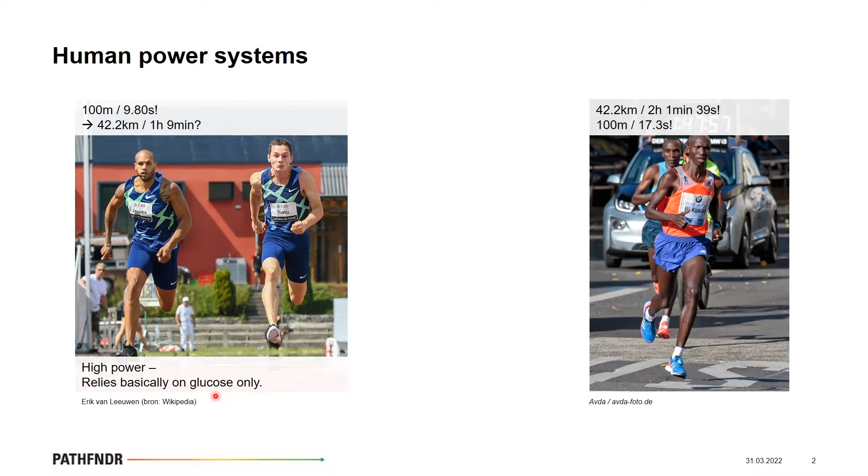And well, the answer is they rely mainly on glucose. So they are a high power system basically. And the marathon runners, they are more like a sustainable power system. They use glucose and fat, and this fat serves basically as an additional energy storage source that these runners can access, and they cannot access it.

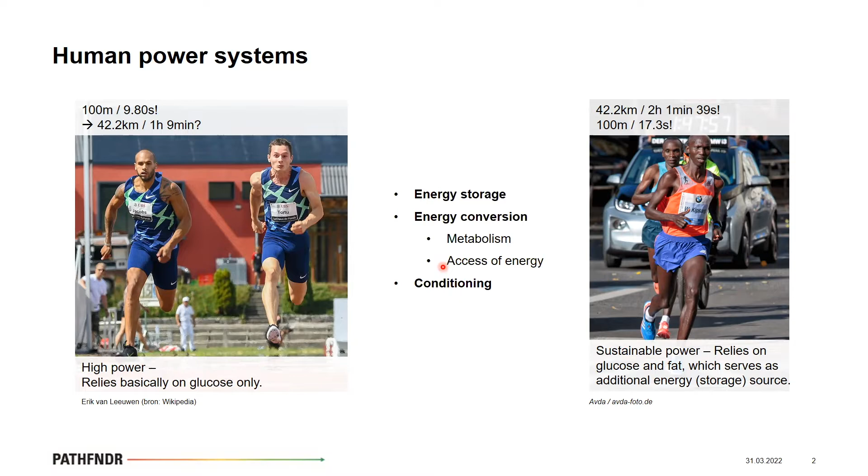So it's about the energy storage they have, it's about energy conversion. They can access the different energy sources differently, and they have conditioned themselves to be able to do that. And that's what we most likely will have to do in the future with our electrical power system or the entire energy system. We see here a graph about some electricity balances of Switzerland.

On the top left, we have the net between power production and consumption. So in the last couple of decades, we basically generated more power than we consumed, and we were able to export this power then to neighboring countries. However, in the last couple of years, from 2005 on, 2006 on, we had net import during winter periods.

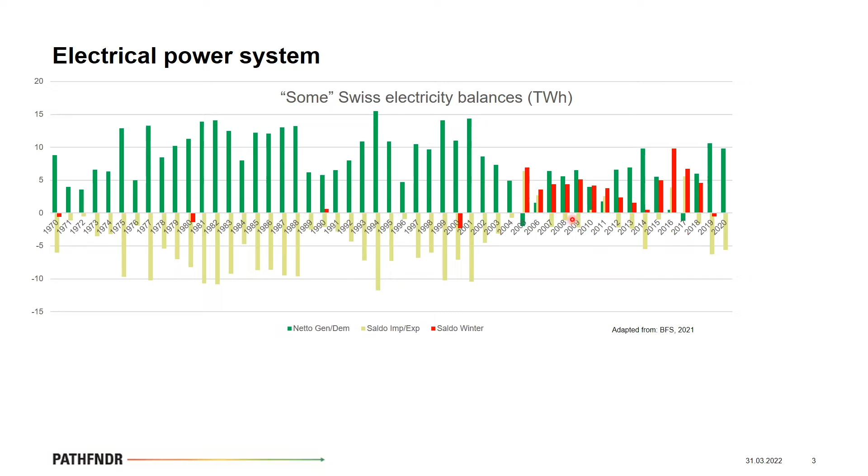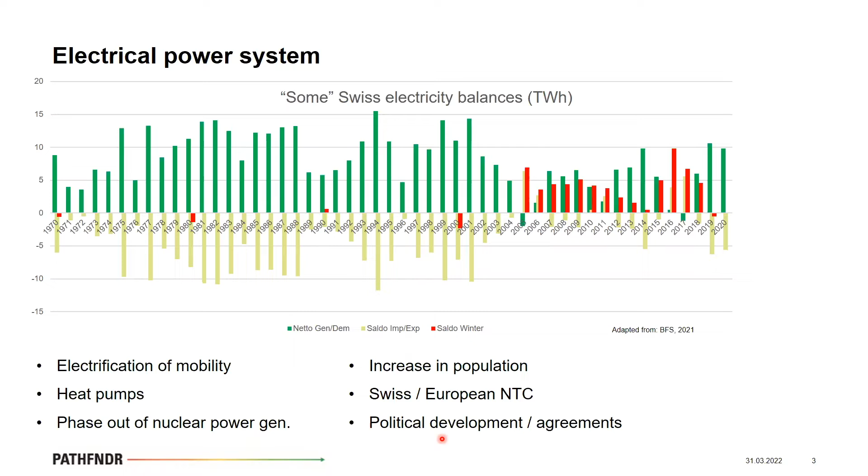And knowing this, and also knowing that we will have the electrification of mobility in the future's power system or energy system, which will lead to additional load on the electricity grid, and also employing heat pumps, and possibly the phase out of the nuclear power generation will also affect the electrical power system. Further on, then we have most likely an increase in population, further electricity demand, and there will be maybe restrictions with the net transfer capacities of electricity that we can import to our electrical power system.

On top of that, there might be weather effects like the Dunkelflaute, basically where no renewable energy can be harvested, and that might lead in future, that's a hypothetical scenario I've sketched up here, to us having the possibility to import around 10 terawatt hours of electricity, but we will still have demand that is not satisfied.

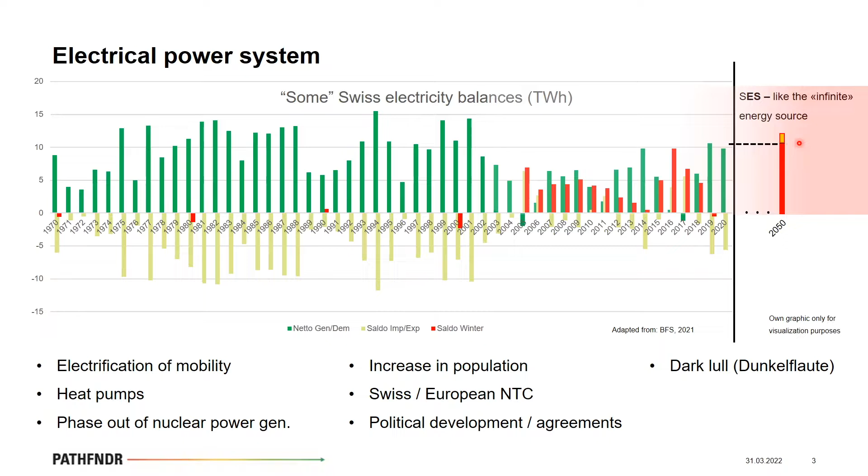And that's why we need something like in the runners scenario, an additional energy source, for example, hydrogen or methane, that we then can access and reconvert back to electricity. And that's one use case, seasonal energy storage, that the platform can provide data for, but also for other applications. I will cover one later on in the talk.

So the demonstrated energy system integration platform is about renewable energy storage. And to store renewable energy, you need to be able to convert the electrical energy to another vector and back to electricity. So that's what we want to investigate, the characteristics of the different chains comprised by the power-to-gas-to-power path. We also want to demonstrate this energy storage using relevant technology readiness levels. So the power plants we have, you will see that later on in the features, have a nominal power of around 100 kilowatt.

And we want to build a bridge. I mean, it's nice that we have this small bridge here from the ESI platform to the areal of PSI, but this could also be the outside world, like the industry and the public sector, where we want to have the transfer of the technologies to the industry, for example. And it can be also used as an educational platform to transfer the know-how to students or other scientists.

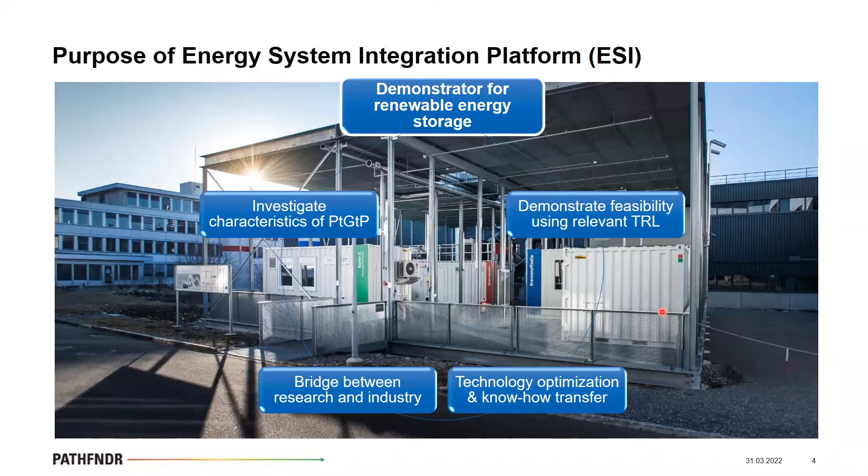What I'm going to cover today is basically the purpose we just saw. It's about energy storage, energy conversion, that we want to demonstrate with this ESI platform. Next, we will talk about the features of it, and then how the features contribute to specific case studies, where we investigated what possibilities are there to use the platform. And last but not least, of course, the application in PATHFNDR.

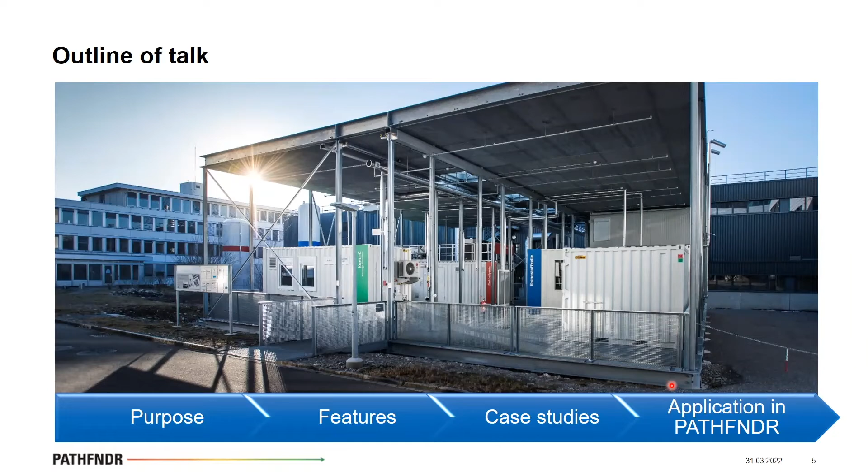We have two containers, one for dry and one for wet biomass. So we use the CO2 stemming from biomass, or one also could use the CO2 from the industry, to form methane with hydrogen, which then will be fed to the gas grid.

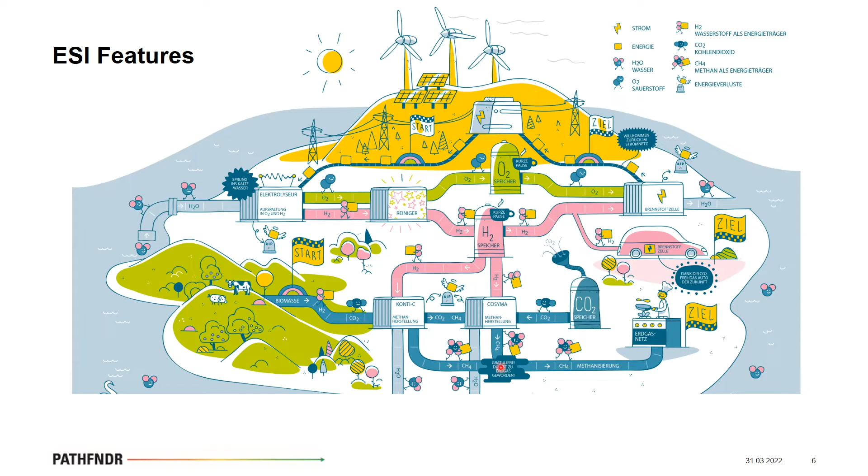And we will focus in this talk on the energy system integration platform's hydrogen path. The hydrogen path, as I said, consists of electrolyzer. In the electrolyzer, we have stacks that have cells with polymer electrolyte membrane cells, so it's PEM-based, and also the fuel cell container, the stacks built in there are PEM-based.

The entire chain also uses, next to the hydrogen, which is stored in this tank, oxygen. So we have two large tanks and a small tank for the methanation where the CO2 is stored, such that they can do their tests. So it's based on pure oxygen instead of air. The gas quality we can store is 4.5, so it's very clean. No impurities are basically in there, and it's also very dry. We achieve a dew point smaller than -60 degrees C.

And the platform in itself allows for intermittent operation, which is required for the storage of renewable energy. It's connected to the low voltage grid, and it is fully automated. That means we can access and do case studies using the power plants, electrolyzer, and fuel cell from remote places. The data acquisition system comes with a sampling time of 5 seconds and is based on a Siemens process historian system.

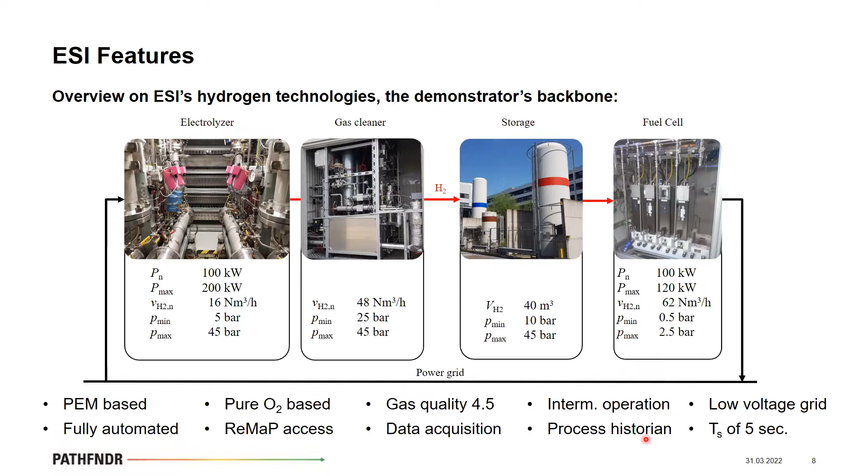And we then went on in collaboration with Swiss Hydrogen to build the fuel cell systems, 50 kilowatt fuel cell system, and integrated it in a fuel cell container. And the last point of the fuel cell container was in 2019, where we achieved to operate 100 kilowatt of fuel cell power to be fed into the grid via a series connection of fuel cell systems.

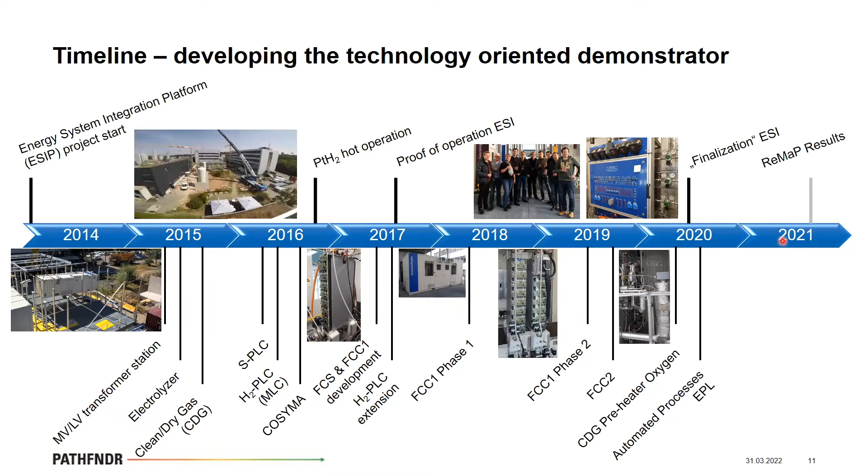Next to that, we have features like testing infrastructure for other fuel cell systems, which will be used also for Pathfinder later on when we want to test hydrogen air systems. And we improved already some parts of the processes, like the gas cleaner, which allows us now to start up the plants or the power to gas, power to hydrogen path much faster than before. And last year we did some ReMaP tests, and one of the results I will show you now in the case study slides that follow.

The case studies, the first one is about electrochemical energy storage. So not only seasonal energy storage, as I already mentioned, is a possibility to use hydrogen and the conversion processes taking place for this energy storage, but also, for example, peak shaving a fast charging station at the highway rest stop. We see that on the left-hand side, we have a Porsche Taycan, which has a charging curve. So that's in kilowatt power over the state of charge.

We then translated this curve to power over time, and we were able to use Empa's ehub battery to basically simulate this charging behavior. And if you don't do anything, you will cause a relatively large stress. So it was basically also scaled down to 100 kilowatt because the battery at Empa was not able to further increase the power. You would cause large stress if you drive 100 kilowatt or the 270 kilowatt of power over a transformer. And if you can peak shave that, of course, that would be a nice thing. And we will see later on here that you can optimize the operational costs.

And we demonstrated that it is feasible with a hydrogen energy storage system to peak shave such a charging demand. We see here the aggregated powers over the virtual transformer station, and that it actually pretty much follows the peak shave limit of 30 kilowatt. And by that, we also demonstrated that the ESI platform is accessible from the outside world and can be remotely controlled.

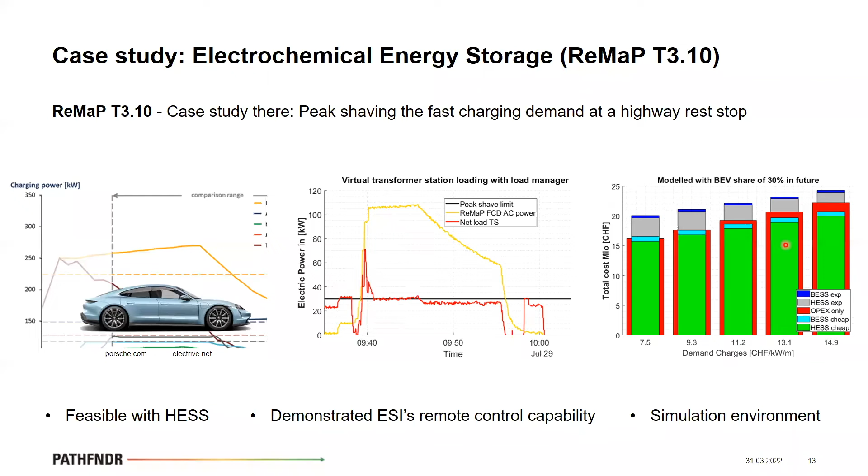The second use case I will talk about is the advanced control algorithms for the future energy system. It was about electrolyzer modeling and real-time control for optimized production of hydrogen gas. We see the Silyzer 100, its representation sketched here. So there are different parts within the PEM electrolyzer.

We have the power converter stage, basically rectifiers. We have the stacks. We have pumps, several pumps to achieve the cooling of the stacks. We have external coolant loops and passive elements within the electrolyzer. And if you want to use an electrolyzer in model predictive control, you need to derive a suitable electrolyzer model. And we did that using system identification.

So we now have a tool that also can be used for the fuel cell. We can do similar steps to derive a fuel cell model later on. And the test for the model predictive controller was the setting of having a refill demand of fuel cell cars. It's given here in kilowatt hours. We have as boundary conditions that we can make use of renewable PV generation. And we had a varying price for the electricity drawn from the grid.

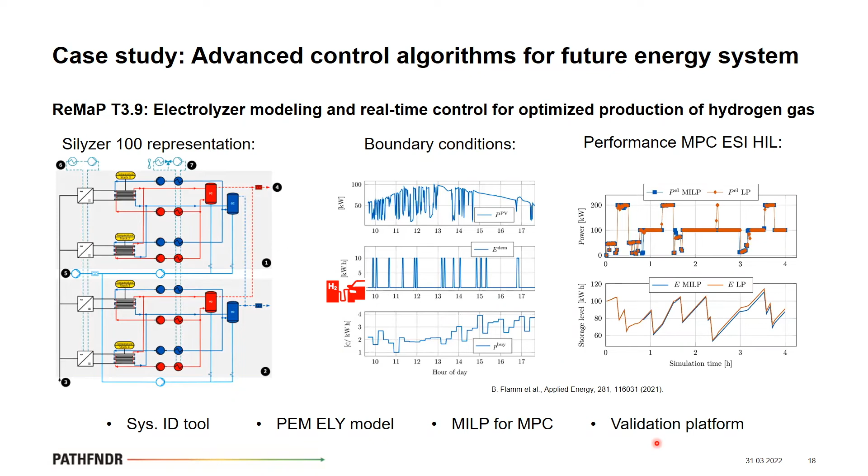The third case study, and that's the last one, is about power system frequency control using the PEM technologies. So if you have disturbance events in the synchronous grid of Europe, there's an example shown here, data existing from 1997. We see that there were several disturbance events before that year, which were then mapped on this graph, and they amount to 1 gigawatt to 3 gigawatt.

And so one needs to have about 3 gigawatt of reserve power for primary reserve control at hand to counterbalance such disturbance events. And if you want to participate in this primary frequency control reserve market, you need to be able to perform tests that validate your technology to be suitable for such tasks. And we see here the results for primary frequency control tests. We also did secondary frequency control tests, which also were successfully carried out.

In the primary frequency control case, we see that the frequency can increase from 50 to 50.2 hertz, or decrease from 50 to 49.8 hertz. And then the power plants must react correspondingly. In the case of the electrolyzer, we see here in the green curve the response, and in blue we see the response from the fuel cell. And the same is true for the right-hand side plot, again the fuel cell, and here the electrolyzer performance. And we see that these responses always stay within the dashed lines. This means that the tests were successfully carried out.

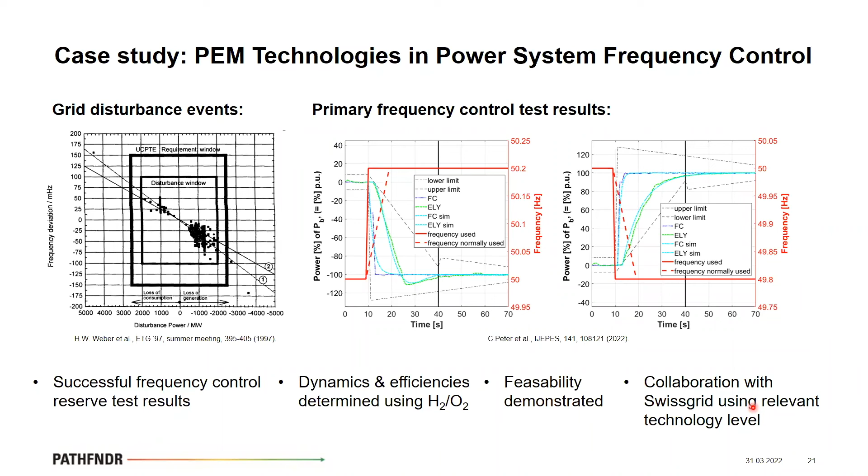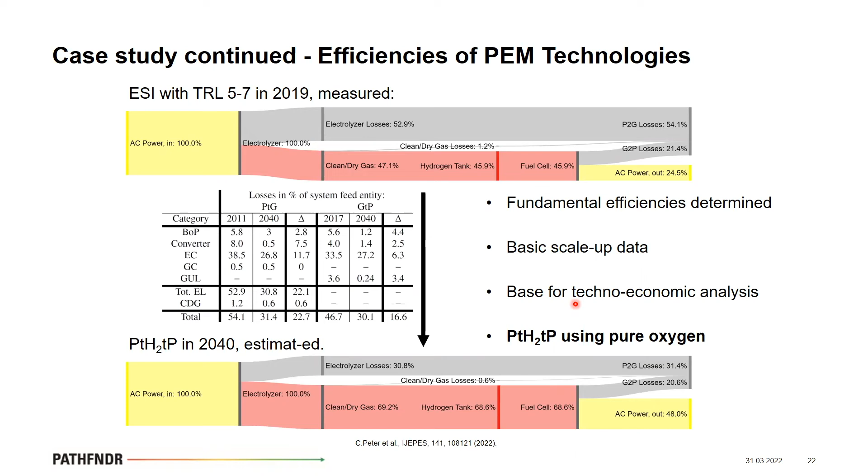And again, highlighting that we used pure oxygen, we also would like to do similar studies using hydrogen-air systems as shown here. And we also want to determine the dynamics and efficiencies in a more detailed manner. We want to include the degradation data and then provide control-oriented and high-fidelity models to Work Package 2.

And there is already close interaction going on with Work Package 2, and maybe there will be further collaborations between Work Package 6 and 1, either directly or, I would say, probably more indirectly over Work Package 2.

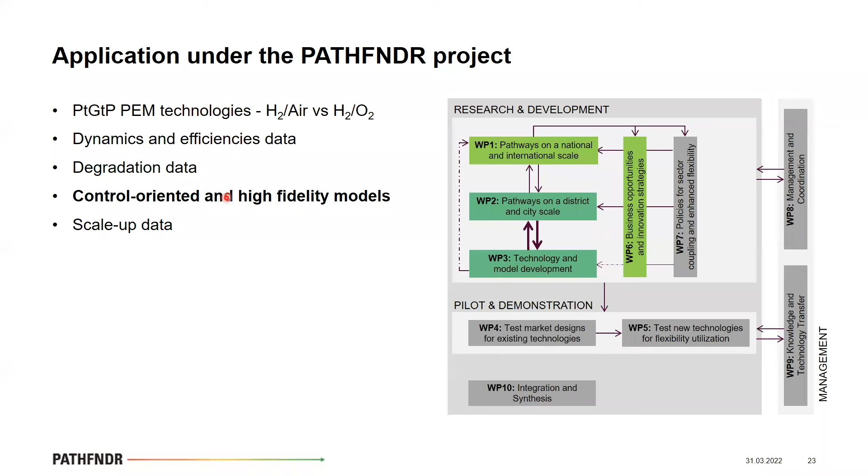So then we also want to have these models scaled up to a relevant scale and provide that to Work Package 2. And we also want to do an assessment on salt caverns that can be used for large-scale hydrogen energy storage.

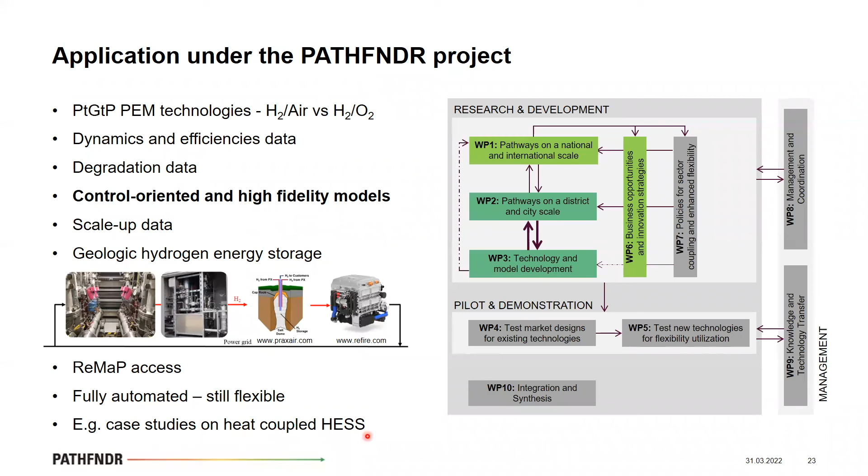And last but not least for this slide, since our demonstrator is now accessible over ReMaP, there might be other case studies that are of interest, like heat-coupled hydrogen energy storage systems. So if you would like to do that, please contact us. We are looking forward to carrying out such tasks.

And how we can do that in the end is by using the user interface. I mean, you could come to PSI and just use the human machine interface of the corresponding power plant. Here the fuel cell is shown. With that, we would have a lot of flexibility implementing different control strategies on the low-level side, but there is also risk coming with that. And if we go to the high-level control scheme, there is less risk, but also less flexibility.

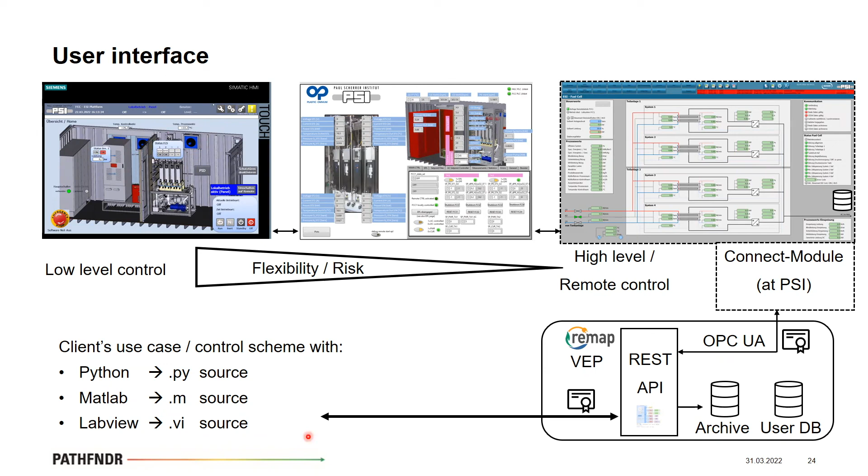To do that, you need a user account. You can get that from the project leader at PSI or ETH. Once you have a user account, you can access the wiki and example code and upload your source code here.

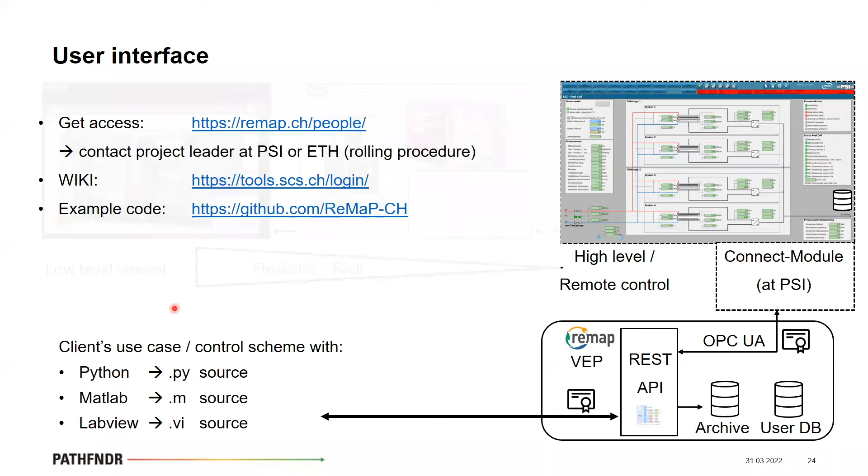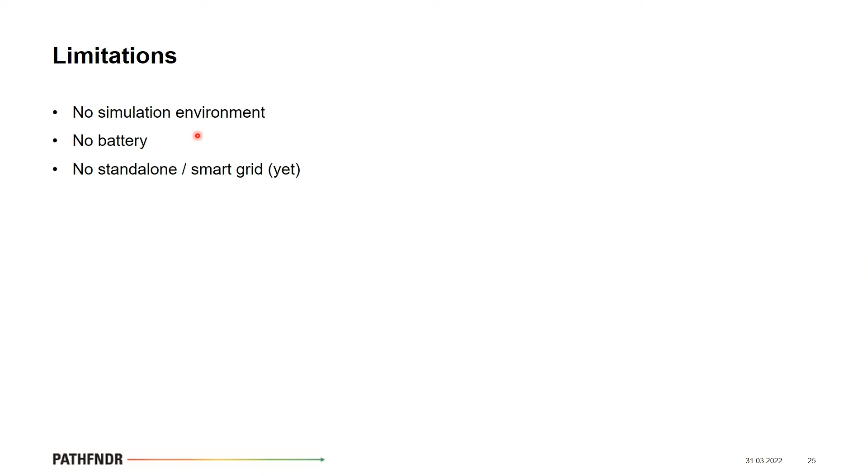With respect to the limitations, as in EMPA's case, we do not have a simulation environment. We do not have a battery here, but EMPA does, of course, and we do not have a standalone microgrid nor a smart grid, at least not yet. Maybe in a future extension phase, we will see, but EPFL does have one. So we complement each other quite nicely.

And the users we expect or have had so far were researchers that did control algorithm development or system analysis, and industry partners who developed components or did system development on the ESI platform.

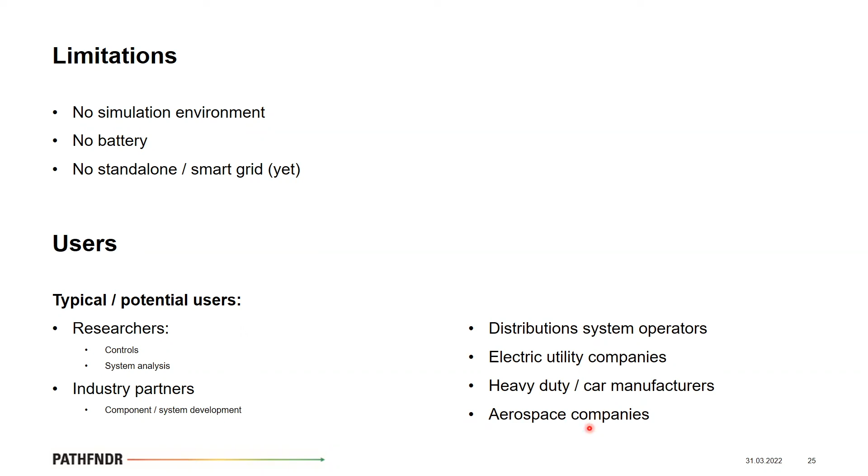For future collaborations, of course, it would be interesting to collaborate with distribution system operators and electric utility companies, and we would also like to test further fuel cell systems from heavy duty or car manufacturers. Another possibility would be to work with aerospace companies, because they also intend to employ fuel cell systems in future airplanes. With that, I come to the end of my lunch talk.